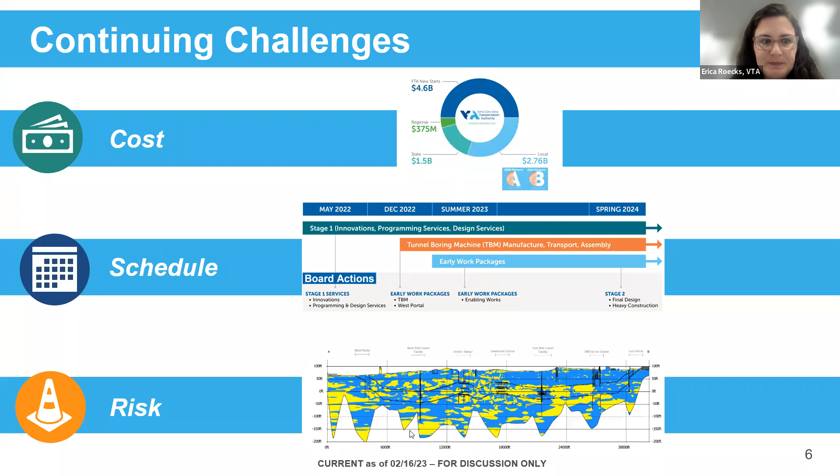Wanted to touch on our funding plan. As you recall, there's funding sources from federal, state, regional, and local level. So there's no change. We have our local sales tax measures, Measure A and Measure B, and our regional RM3 money.

In addition, the state of California awarded $375 million to VTA for the BART Silicon Valley extension. This new award is in addition to the $750 million that we received previously, bringing the total through the TIRCP program, the Transit and Intercity Rail Capital Program, to $1.125 billion.

Last year's state budget surplus made additional TIRCP funds available for transportation infrastructure projects throughout California. So this infusion of additional funds is an important step for us as we're entering into the New Starts program for roughly $4.6 billion in federal contribution for the project.

Exciting progress. As Kristen alerted you of, and we've alluded to here, Doug mentioned as well, there was a report out to the VTA board at the February meeting on the station refinement effort for the Downtown and Diridon stations.

The station refinements are related to the configuration of the stations, which is included in the tunnel and track work contractor's scope. Adriano is going to be touching more on that in a little bit.

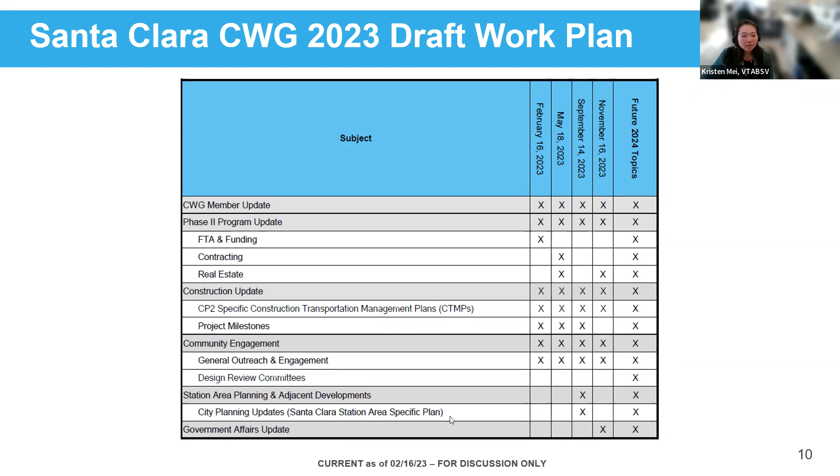So after discussing with our CWG chairs over the past few months and weeks, our BSVII team has begun researching and looking into potential CWG member additions. Through these potential additions, we're hoping to really diversify and broaden representation amongst our CWG members and integrate some of your suggestions from earlier meetings on certain organizations we should be engaging with. The addition of these CWG members will hopefully work to enhance our multidisciplinary group with backgrounds in education, active transportation, and other underrepresented groups. So we're looking into that.

Although we haven't really gone through the process of directly reaching out to the group specifically, we wanted to remind you that potential new members would all have to meet our existing CWG member criteria. That includes not having more than 1 seat per organization across all the CWGs. It also means the nominee must live or work within half a mile from the alignment, or represent a group or organization focused specifically on issues within that half-mile radius. The nominee must not be an elected official or work directly for an elected official that represents San Jose, Santa Clara, or Santa Clara County. And the nominee must not have a conflict of interest in relation to the project with regards to property, or VTA's current or potential vendors, consultants, or contractors.

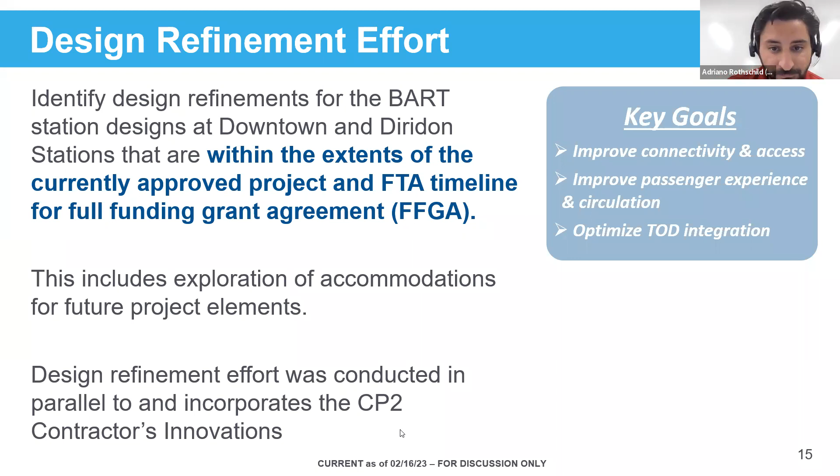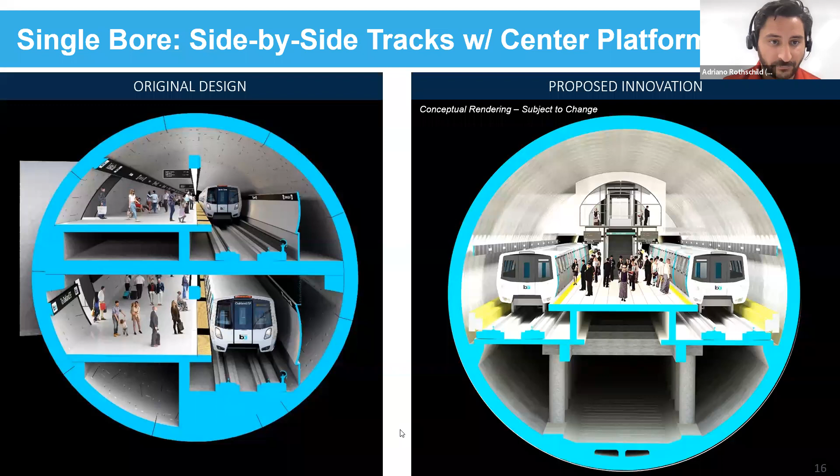So the big innovation from the contractor was a new tunnel configuration, with the tunnel shifted to a larger diameter that allowed side-by-side tracks and a center platform. This configuration has been adopted, and largely this means that all passengers will be able to access the platform from the same concourse level. As you can see in the image on the right, there is only a single passenger connection from the station sites to the concourse level, and from there passengers would be able to access the center platform and trains in either direction.

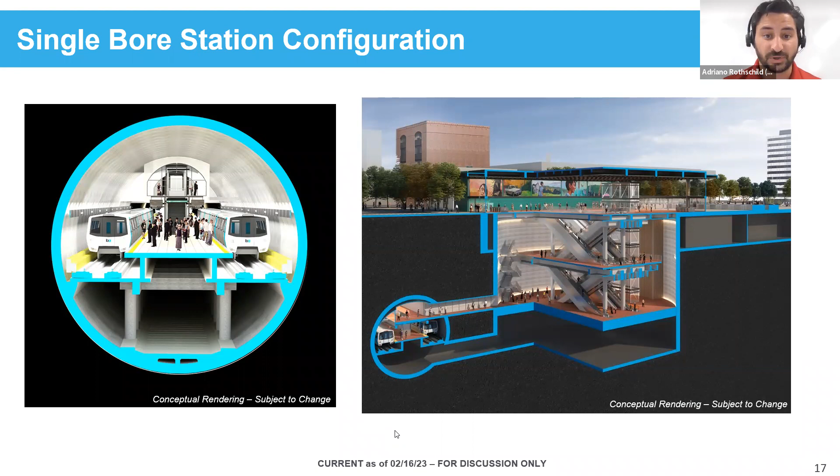The effort, which kicked off in early summer, consisted of significant coordination with the City of San Jose, SPUR, and other stakeholder and agency partners. We conducted 7 workshops throughout the summer and early fall, and through those identified some of the key goals, evaluation criteria, and potential refinements.

We then took those back and really dove into the feasibility from a technical, timing, and engineering standpoint, and further refined those to identify what could be accommodated by the project. So all of the refinements were really evaluated from a passenger experience, TOD integration, and constructability standpoint.

While one of the original focuses was to focus on TOD integration, the approach being taken for the two downtown stations is to really maximize the public benefit by focusing on placemaking, looking at opportunities to provide public spaces above our stations or around our stations, really creating an environment that our people can hang out in and cherish.

Two examples we are looking at include Salesforce Transit Center and the recently opened Central Subway Chinatown Rose Pak Station, which both include rooftop amenities rather than TOD above the stations.

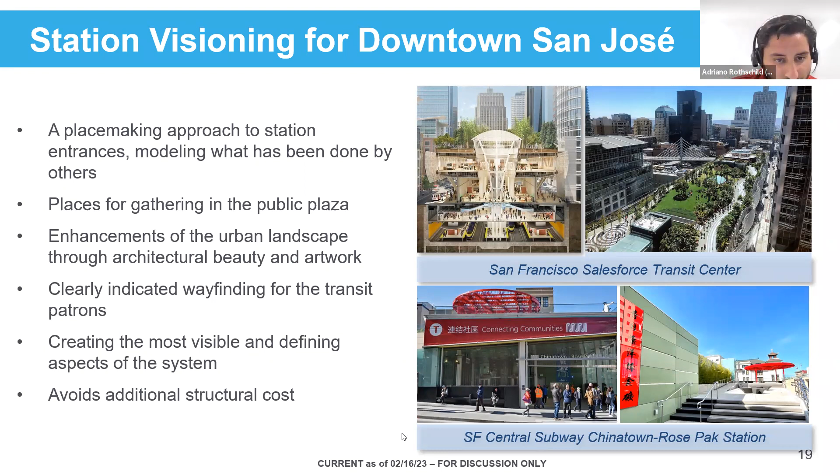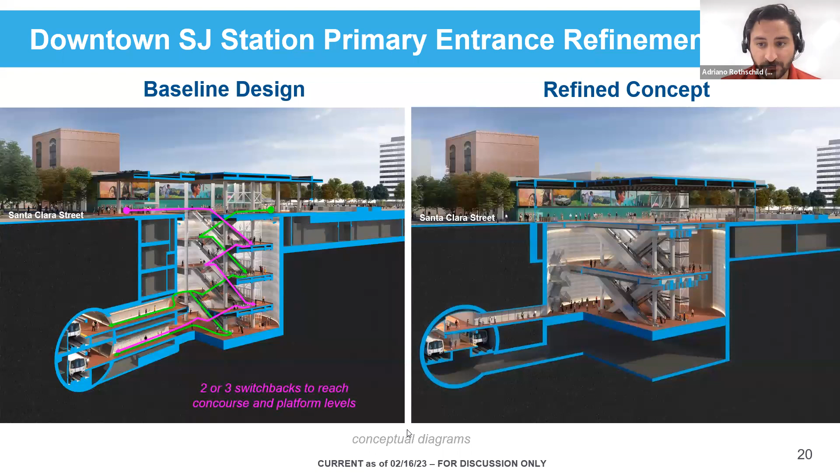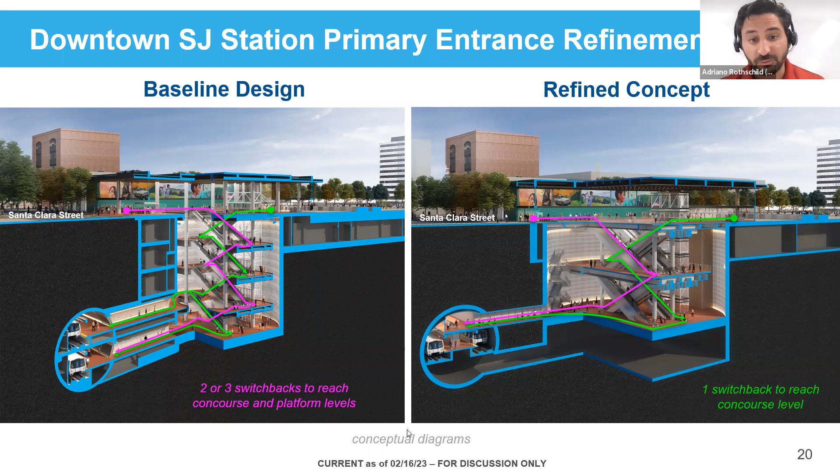The refined concept widens the diameter of our station shaft, allowing for longer escalator runs and reducing the number of switchbacks to just 1 to access the bottom concourse level. Overall, this refined concept significantly improves passenger experience by providing a more intuitive path of travel to the trains.

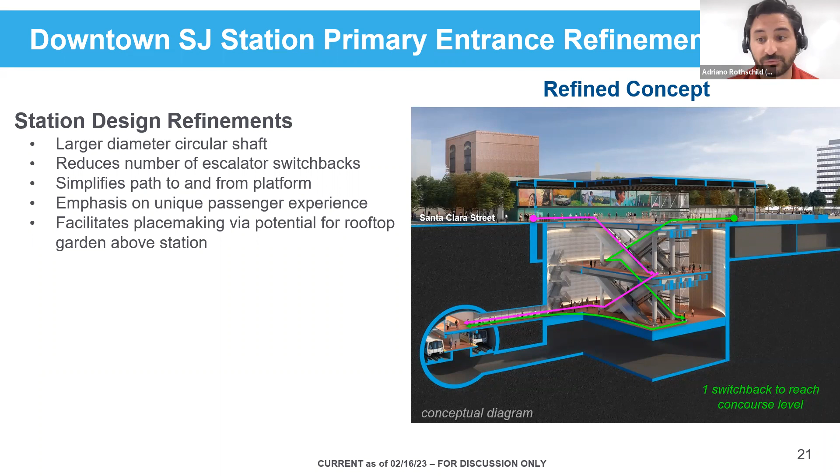The larger diameter shaft does impact the ability to accommodate on-site high-density TOD above the station entrance building itself, but the station will be designed to fit into the surrounding urban fabric, and we are looking at the possibility and feasibility of including rooftop amenities above the station.

Although we are no longer pursuing high density TOD immediately above the station building itself, there is still well over 1.5 million square feet of TOD envisioned for the station block as planned by VTA's design development framework. We think most of the TOD previously envisioned above the station can be reallocated elsewhere within that block itself.

Looking a little further out, there's a lot of other TOD development planned and envisioned in the station area. So we felt that maximizing TOD immediately above the station was not a top priority.

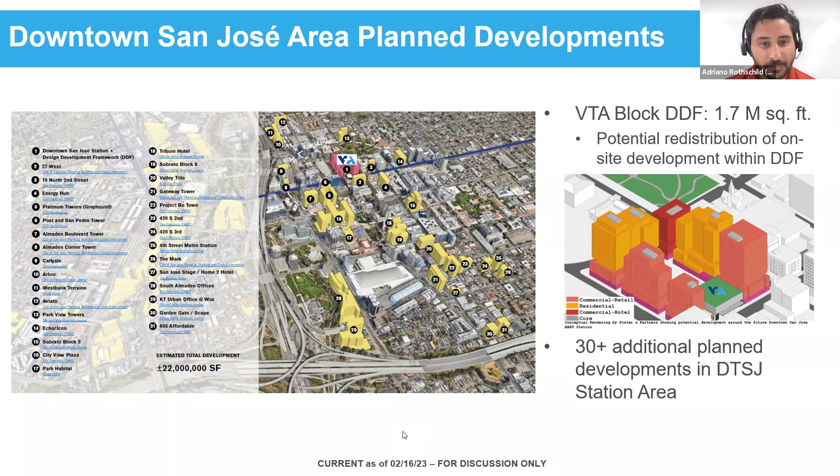Another comment we've received and looked into is the feasibility of providing an entrance to the south side of Santa Clara Street. VTA and the city explored multiple locations. Ultimately, it was determined that the corner of Santa Clara and Second would really provide the best opportunity in terms of connection to the south and to the First and Second Street light rail or transit malls.

However, this property and site is within a historic district, and so it poses significant challenges from a timing and environmental clearance standpoint in order to incorporate it into the project itself.

Instead, VTA has decided to extend our platform or concourse level, currently shown in yellow in the image here, eastward as represented by the purple section, so that a future entrance could easily connect to that concourse when it is built. We're also providing a knockout panel, or steel doors, within the tunnel lining itself to facilitate that future connection.

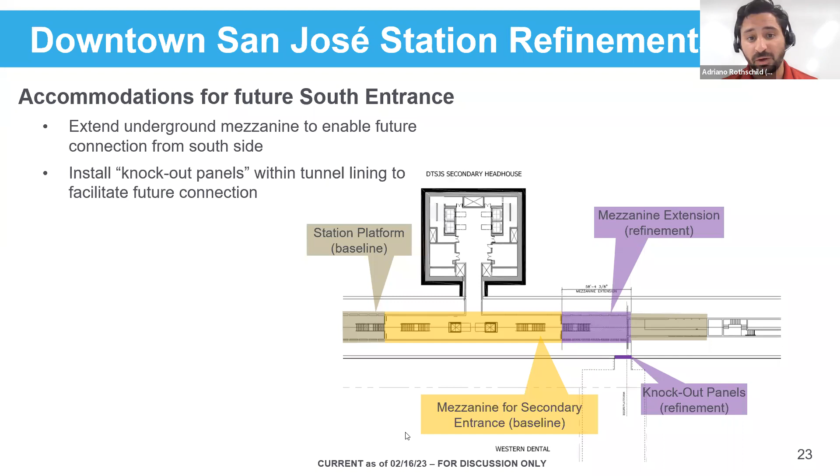At the February VTA Board of Directors meeting, project staff was also asked to continue working with the city to further explore a feasible path forward for making this southern entrance a reality. We will be reporting out on that in the coming months as we advance it.

Moving on to Diridon Station, here passenger experience was generally much better and more intuitive than at the downtown station. In fact, passengers would access the platforms in the exact same way as our refined concept for downtown. So the focus at Diridon was really to look for opportunities to improve TOD feasibility on the station site.

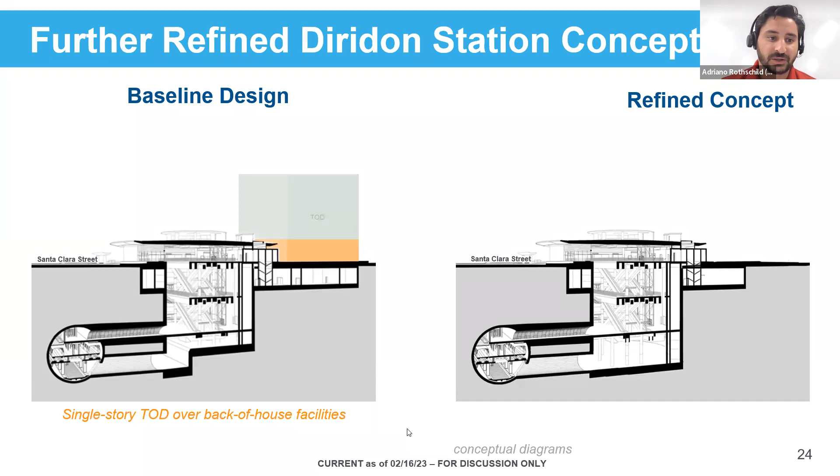The baseline design is shown on the left here and the refined concept on the right. The baseline design included the ability to accommodate up to one story of TOD above the back of house facilities, shown behind the station site, just below ground.

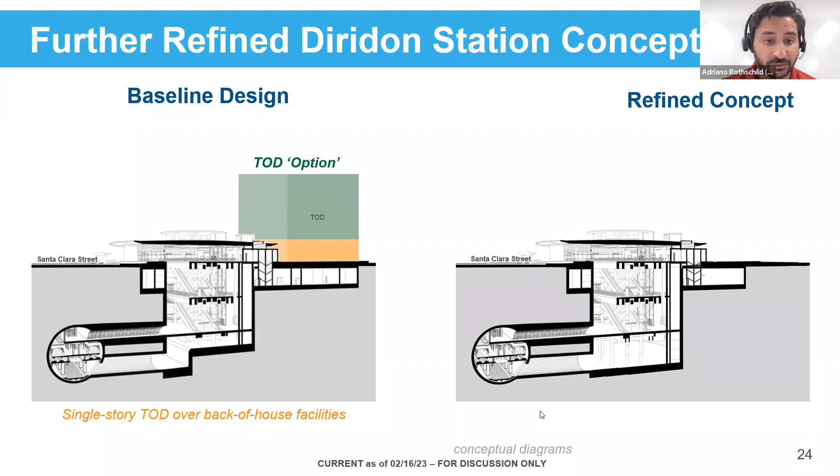For an additional cost, accommodations could be made to allow for more dense TOD above that, though that TOD would be subject to very stringent seismic and design requirements, and likely would cost significantly more for any future developer to construct. With the tunnel innovation, we are actually able to move some of our back of house facilities from just below ground all the way below our public facing facilities within the station shaft, as represented by these red arrows.

And what that means is that the southern part of the block is fully unencumbered, not subject to any BART or stringent seismic requirements. This really makes the TOD on the site much more feasible, much more likely to happen.

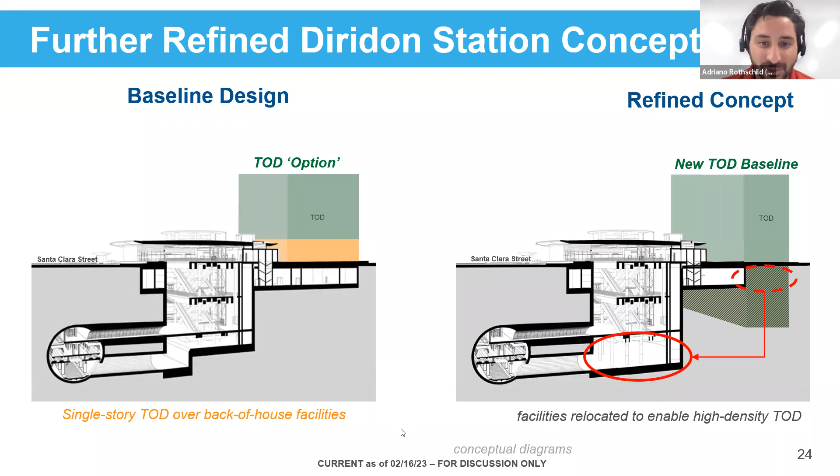In addition to being less costly to construct, now we also have the ability to provide some underground amenities, or the future developer would be able to provide some below ground amenities that were not feasible in the prior design.

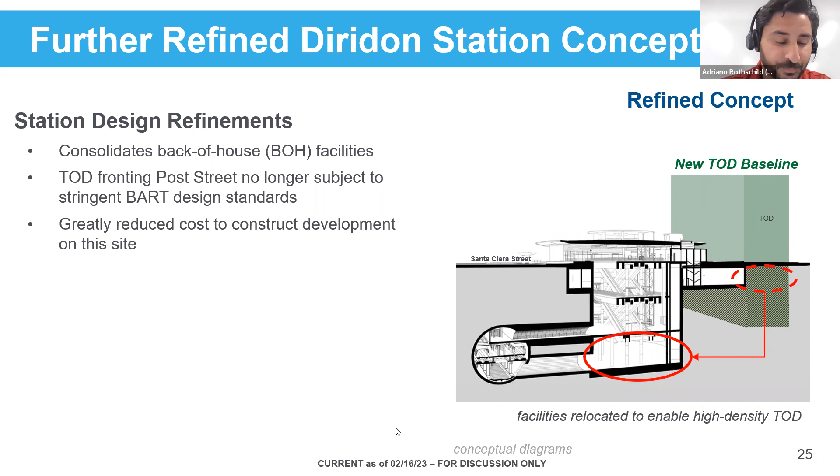So overall, this refinement really just improves the feasibility of TOD and provides a much more efficient way to construct our stations as well. We think that this refinement would allow TOD to be much more likely to occur in the future.

Putting it in perspective, there are more than 4 million square feet of office and mixed use new development planned in those blocks immediately adjacent to the station site. And there are well over 18 million square feet of development planned in the station area as a whole. So we feel that the focus on public amenities over TOD, or maximizing density, was appropriate for this site.

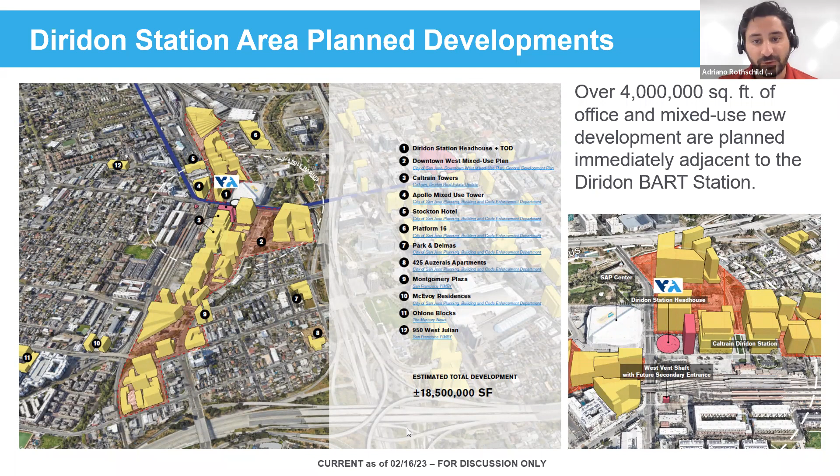We also looked at the opportunity to provide a second entrance to the west of the railroad tracks to fully integrate with the future Diridon intermodal station concept as currently envisioned. Due to some of the uncertainty around where that concourse will really be located and how to best make that connection, we're not able to make any accommodations for it right now. However, those are still feasible to be pursued in the future if desired by the DISC partnership.

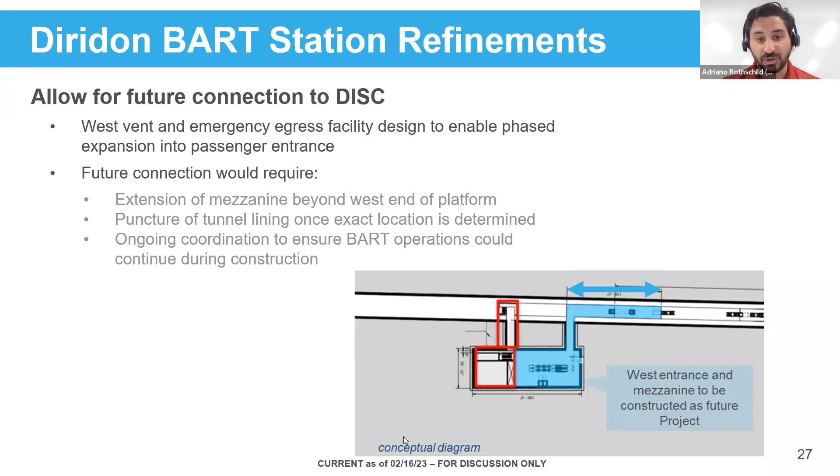They would need to extend the concourse as shown in blue in this image and construct a new station entrance immediately adjacent to our site.

In addition to the downtown and Diridon stations, there is a refinement to the 28th Street Little Portugal station. This refinement was initiated by the design build contractor, the tunnel contractor, and really shifts from a cut and cover construction method for the 28th Street station to a construction method much more consistent with the other two San Jose stations, by shifting to a circular shaft.

We're able to optimize construction by being more consistent with the other stations' designs, but also significantly reduce construction-related impacts as the amount of soil to be hauled and excavated is significantly reduced. And lastly, this refinement would provide a consistent way of accessing the station platforms that would be similar throughout all three of the San Jose stations.

I keep forgetting to put a final slide in here, but just wanted to note that the focus of the design refinement effort was to really look at the below ground facilities and the structures that are required for the contractor to advance today. We will continue to work with the city and surrounding stakeholders as we further look at the actual station entrance buildings, the way they look and feel around the outside. So the shaft below ground does not dictate the way that the station above ground needs to look. And that is my update.

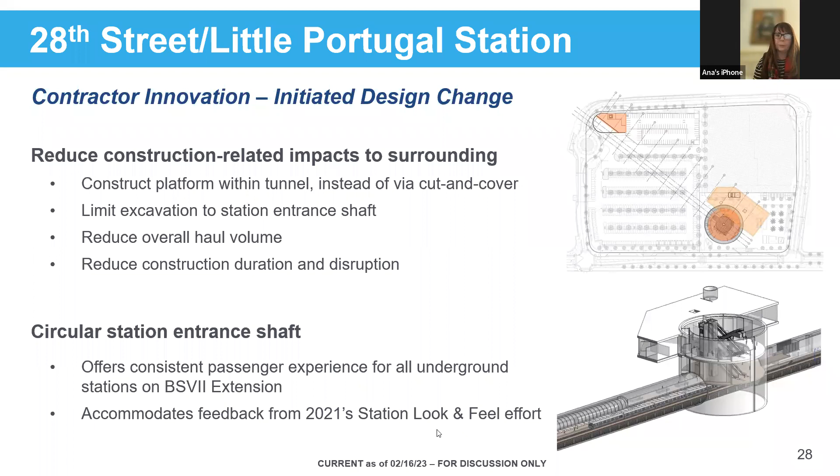Thank you. Any other questions or comments for Adriano on the material he presented? Don't see anything in the chat. Jonathan, I still see your hand up - I imagine that's a remnant. So we're going to go over to Erica with the update on construction activities.

Starting in late February, KST, the contractor for the tunnel and track work contract, will be completing some exploratory geotechnical borings along the tunnel alignment from the Diridon area over to the east portal. Nothing super close to the area where you all are, but wanted to share that they're starting to happen. There'll be over 50 borings occurring, each for approximately one day.

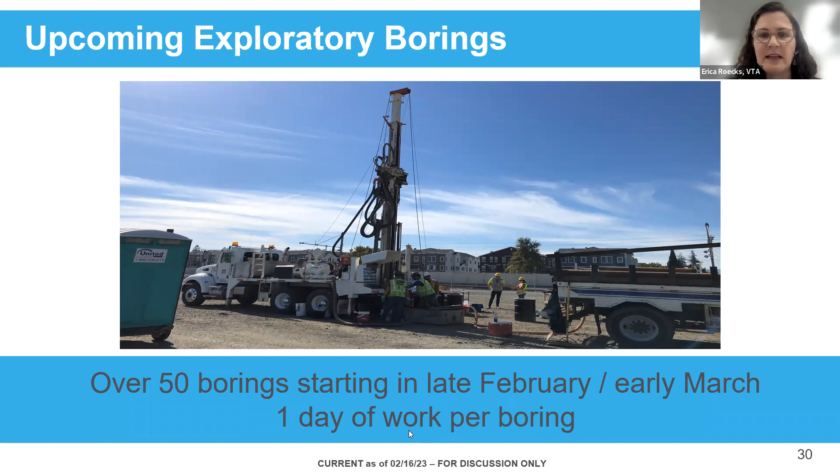Now on to the construction transportation management plans update. To give a reminder of the development process, we have regular coordination meetings between the contractor, VTA, and the city, as well as regular coordination meetings with adjacent developers and groups throughout the development to provide input and discussion.

We will also be presenting the draft plan on how access for all modes will be coordinated during construction to the community, hosting public meetings within the individual work areas covered by each of the CP2 specific construction transportation management plans. The public meetings will include the development process, the schedule, and details on the construction work area, work hours, and the plans to minimize impacts.

As mentioned in the last meeting, we're working with KST on the first CTMP. KST is Kiewit Shea Traylor, the contractor for the tunnel and track work contract, which covers early construction activities at the West Portal, where the tunnel will be built from within VTA's Newhall Yard. We have an upcoming public meeting where we will be sharing information - an in-person meeting on Wednesday, March 15th at Santa Clara University, and a virtual meeting on Thursday, March 16th.

Thank you to Santa Clara University for volunteering to host. I know they're not here today, but we appreciate their partnership. We're working on finalizing the flyer and RSVP links, and Kristen will send that out so you can help us with distribution to your networks. That will be coming soon, so wanted to let you know.